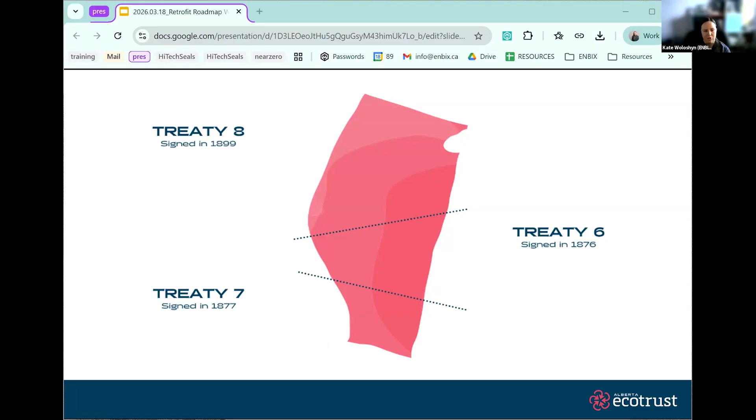These lands have been stewarded by Indigenous people for millennia who have maintained a deep and enduring connection to this land and its resources. We honor their histories, languages, and cultures and recognize the significant contributions they have made and continue to make to this region. As we carry out our work across Alberta, we commit to respecting and upholding the values and traditions of Indigenous communities who have lived and continue to live here.

Alberta EcoTrust is a charitable organization advancing environmental and climate solutions across the province. Since 1991, we partnered with governments, industry, nonprofits, and Indigenous communities to mobilize resources, deliver innovative programs, and support projects that make a real impact. We're also a founding member of the Low Carbon Cities Canada Network, a national initiative that accelerates equitable climate solutions in cities through the Climate Innovation Fund.

Through the Climate Innovation Grant, we fund organizations in Edmonton and Calgary working on low-carbon solutions, including the Retrofit Roadmap. This funding helps turn emission-reducing ideas into real-world projects. Whether it's technology demonstration, collective impact, or policy advancement, we support initiatives that drive innovation and deliver tangible benefits to communities. Ultimately, our goal is to strengthen and support those leading the way on climate solutions.

We have two main programs focused on the built environment: the Emissions Neutral Building Information Exchange, or ENBIX, and the Retrofit Accelerator. ENBIX brings the building industry together to share knowledge, build capacity, and support sustainable building and renovation practices across Alberta. Our goal is to reduce emissions from both new and existing buildings. We do this by hosting events, sharing resources, and strengthening skills and training, peer-to-peer learning, and communities of practice, helping people and organizations turn ideas into real-world impact.

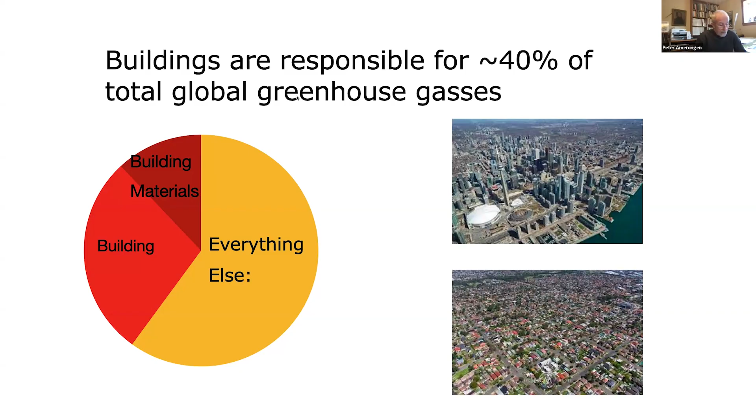I doubt that you folks need to hear this, but deep retrofits are not a choice. We really just can't make our GHG commitments without them because they're such a big chunk of global GHGs and Canadian GHGs as well. So just for housekeeping, when we talk about deep retrofits, we're talking about preparing a building for an emissions neutral future, basically by reducing the energy enough so that it can be powered from emissions neutral sources.

And so why do we need a roadmap? Well, retrofitting is a new undertaking. Basically, we've never tried to save a planet before, and it takes a new way of thinking. And we like to think that we've got as much experience as anyone in this. We've done feasibility studies. We designed and built the Sundance project and a number of other residential projects. We've collaborated on studies in other regions in the country, and we've documented a bunch of them on all kinds of buildings, single family, multifamily, commercial.

And even with all that experience, this is a work in progress. We're still learning from the buildings and figuring out how to do this. So I welcome any observations or comments from any of you about how we can do this better and any mistakes you think we're making. In general, I want to start by listing the problems that need to be addressed, then have a quick look at a few retrofits, and particularly what they've taught us, then look at the recipe that they suggest, and then talk about some shortcuts.

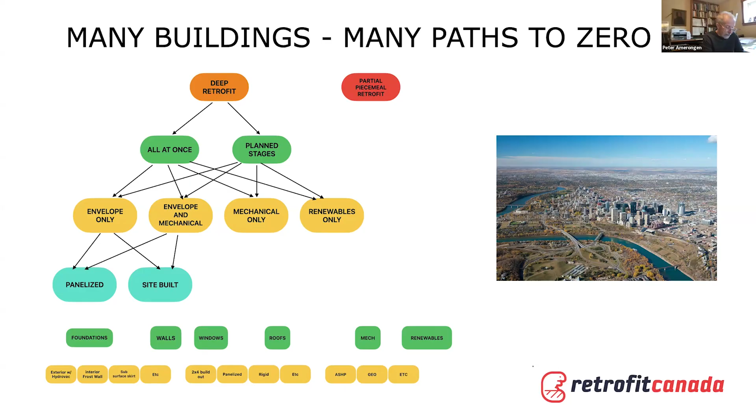And while most of my examples are from residential construction, we've worked on enough non-residential projects to realize that the planning principles that we've learned apply pretty much across the board. Besides cost, the habit that we've got in this country of piecemeal upgrades is another significant barrier that we've got to deal with. And one of my favorite examples is a building that we encountered on the Sundance retrofit. It desperately needed new siding.

They had the sense to know that was an opportunity to add some insulation, but were talked into adding only 3/8 of an inch by the siding contractor, who didn't want to deal with the trim around the windows. So they missed the opportunity to make the building more airtight, to think about how airtightness could tie into other components. When we did the deep retrofit, we covered that up. That money was completely wasted - in fact, it cost us money to deal with over what had been there before.

And we see this - I'll give a couple other examples when I talk about the SSRIA projects. But one of the major problems is that most energy audits and incentives result in only isolated upgrades, rather than a comprehensive plan for zero.

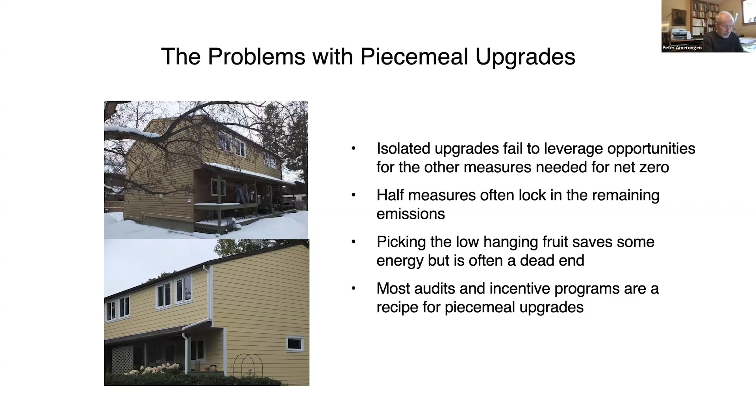And there are other complications in addition to these. There's a serious shortage of trained energy advisors and designers, contractors, and even architects and engineers. They just haven't had the opportunity to gain the experience - and in some cases, the humility to know that they don't know.

And we've somehow got to do this. Basically, to get to emissions neutrality, it almost invariably means we need to electrify, and somehow add this huge load that's now being met by natural gas to the grid without blowing it up.

And there are also risks associated with most upgrades. You change the heat and moisture flow, and you've got to be careful that you're not introducing damaging buildups that can undo your work and put you in a worse place than you started.

So the Sundance project - we didn't realize it at the time. I don't know how many of you know about it. It's an Energiesprong inspired deep retrofit to a 1950s or 1970s townhouse complex in Edmonton, made possible by a research grant from NRCan. The co-op and we didn't know at the time, but the project was the result of a very fluky alignment of the stars - and it's only by looking at other projects that we realized how fluky.

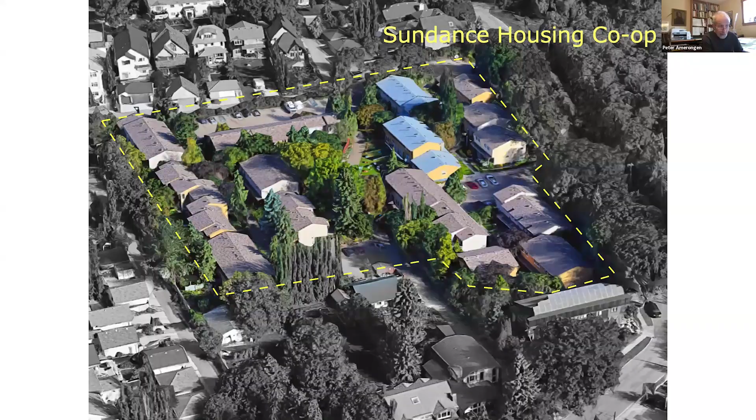Just to give you a sneak peek, we did the full Energiesprong thing, where we learned how to do digital scanning and take the scan to panel drawings. I can't help bragging that every single one of our 350 panels fit.

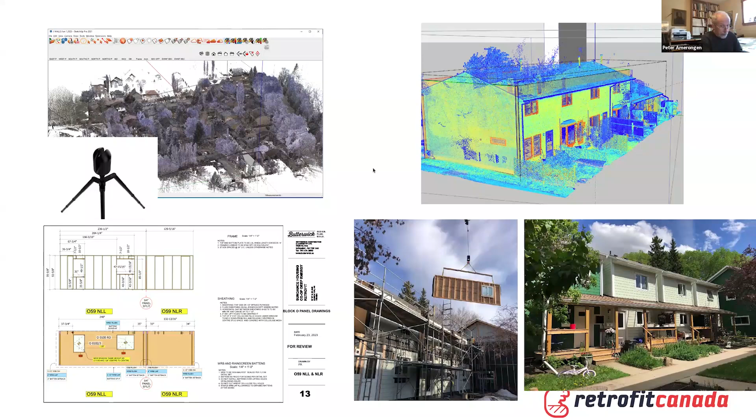It was pretty amazing and really fun. We did the full envelope upgrade, putting a nice warm jacket around the whole house with off-site panels and a scissor truss roof over, and then we were able to get rid of the gas lines and put in air source heat pumps.

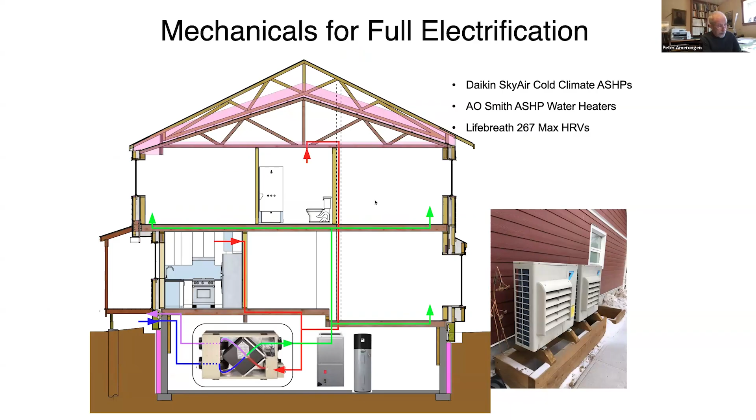We added HRVs and air source heat pump water heaters, getting very close to net zero and making life better for a whole bunch of people.

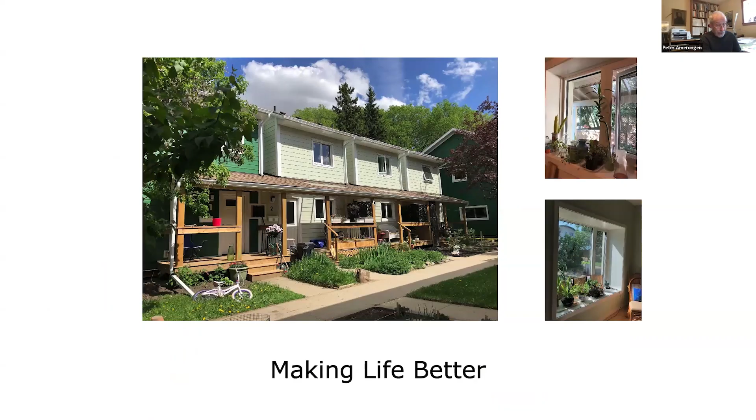So that was the other learning, that people love this stuff. Another project that was very instructive for us, in terms of the variety of solutions that are going to be needed, was this three-house project subsidized by SSRIA.

On every single one of these, people had taken subsidy money and made upgrades that we had to undo.

On the top one, they had put on solar panels, and had the sense to replace the shingles with the solar panels, but that was one that needed the roof to be built up over it.

It had only a 2x4 for insulation space. So we ended up taking those off, throwing away the shingles, and having to put the panels back on.

On the middle one, they had replaced the windows with triple glazed units, but they were very leaky sliders with very low performance specs, and we ended up replacing those as well.

On the bottom one, they had added R50 in the attic insulation without doing anything about the air tightness.

So it just really, over and over, brought home the consequences of half measures.

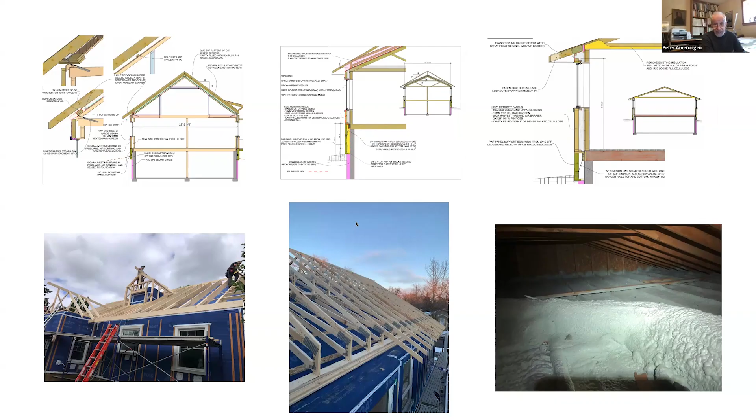From other projects, we learned panelization isn't super practical yet, and we still don't have a panel supply chain that makes it work. Ultimately I think that's where we're going, but...

Because of the work involved in digital capture, transportation, the crane, and all that, it's still kind of a wash. So on a one-off basis, the wall build-up approach, site built, is more practical.

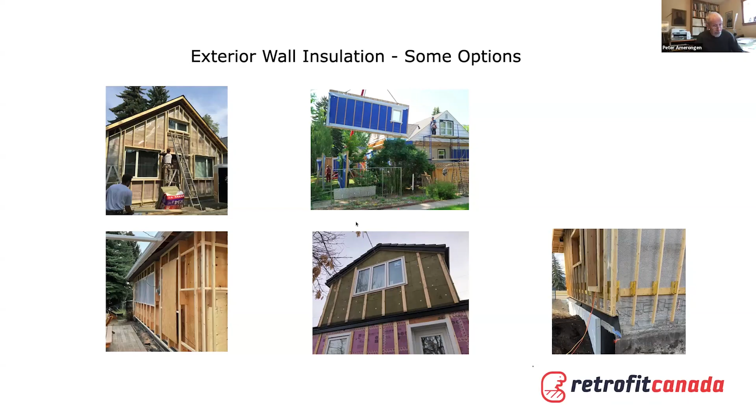It's not as energy efficient as the other projects we've worked on, but because the difference between where we were and where we needed to be was so small, the only thing that made sense was the geothermal system.

And then get the electricity from solar. Many lessons with that too, and we ended up doing this with small equipment on a small site - another thank you to EcoTrust.

They're helping us fund a project where we are experimenting with directional drilling for installing geothermal systems, without turning the site into a World War I battle zone.

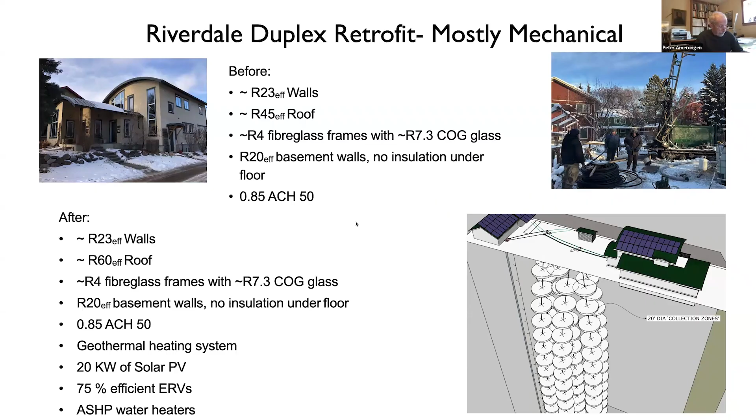And then one project that really brought home how we need to think about these is one in Southern Ontario. It's for a couple that moved back from Edmonton to be closer to their parents in Southern Ontario.

They bought this house with the intention, and with some assistance from us, of finding a house that would be suitable for a net zero retrofit. They couldn't afford to do it all at once, so we had to think about how to do it in stages. The first step, as always, was to do an energy audit to figure out where the energy was going.

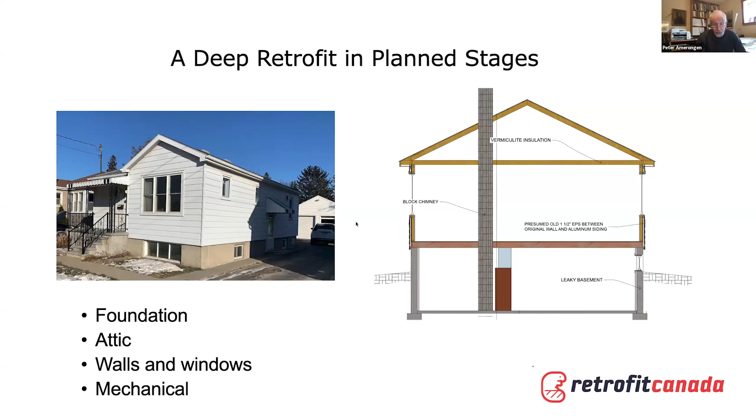Then we had a close look at the house to see what it needed. Unfortunately, they had bought the house during the pandemic and couldn't get an inspection because there were bidding wars going on. They discovered after they moved in that there were some pretty bad leaks and the foundation needed work. That was also one of the biggest heat loss areas in the energy model, so digging it up to put in the weeping tile was an opportunity to insulate the foundation very easily.

But while they were doing that, we realized that if the basement windows were done at the same time, they would never need to touch that again. So the idea was to do the insulation, the weeping tile, the windows, and fixing the grade all in one operation. They put flashing on top of the exterior insulation that was added, and then never touched the basement again.

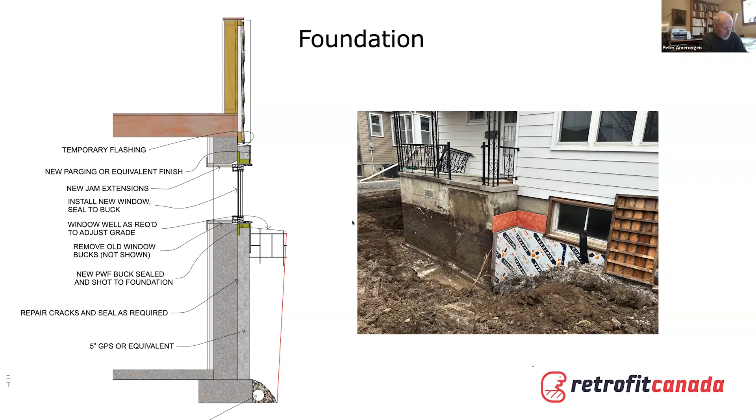The next phase was the attic. It was very poorly insulated, so there was a big energy upside. All it had in it was a bit of vermiculite and some isolated fiberglass bats lying around. They were uncomfortable with the vermiculite because of its asbestos content.

So the plan was to suck that all out of there and add 2.5 inches of spray foam to make it airtight. But before doing that, they took out the existing chimney and used that chase as a pathway to get ducting for a future HRV up into the attic, then run that over to pick up the exhaust from the kitchen and bathroom. All of that was done before the spray foam, so the spray foam could encapsulate it and give them an airtight layer — basically the air barrier and vapor barrier for the house.

Even before that, they also installed a duct for future PV — same idea, never touch it again. When those two phases were being done, attention was paid to the details of how the eventual wall air barrier would tie in.

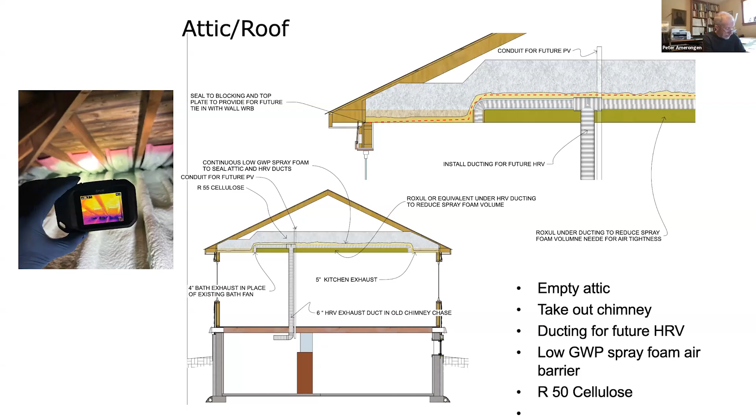But as it turned out, their air conditioner, which is not optional in Southern Ontario, died, so they needed to do something about the mechanical system. At that time they yanked out the furnace and put in a cold climate heat pump sized correctly for after the walls and windows were done, and did the HRV and hot water tank at the same time. That was supposed to have been the last phase, but it got moved up. Because the heat pump was a little undersized, they supplemented on a couple of cold days that first winter with baseboard heaters.

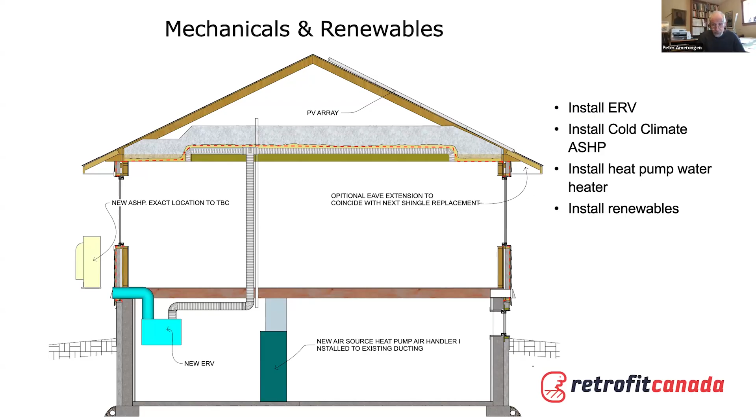Then the last phase was the walls and windows, which were easy to tie in because we had thought about it. I think you can see this last phase was done this spring — I need to get some pictures of it.

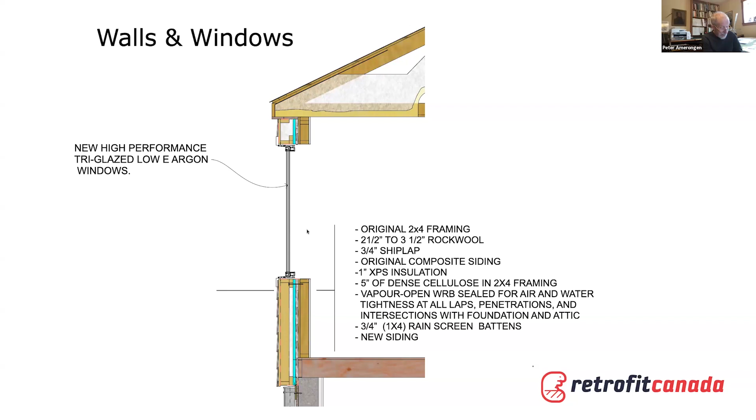So from this, we've derived what we're calling Deep Retrofits 101, which is the foundation for the roadmap. You start by dialing in the best 2040 version of the building, considering where the energy is going now and what the building needs or is likely to need in the way of improvement and maintenance. Then you develop a plan to do that as efficiently as possible, geared to the conditions and constraints associated with that building. For example, if it's a historic building, you might just say we're never going to get all the way.

We're going to have to get, just count on buying emissions neutral energy. But whatever the best 2040 version is, if you can't do it all at once, make sure everything you do is to the 2040 plan, and do it in a way that anticipates the remaining steps.

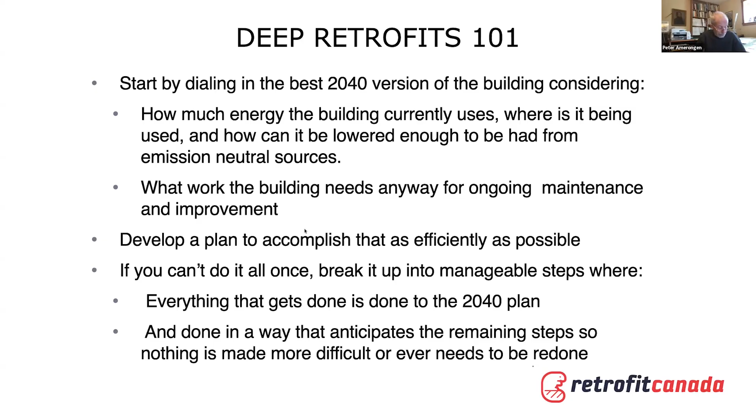So the general recipe that comes out of that: the first step is to establish some kind of ballpark feasibility to make sure that it's a real project.

This can be a challenge while we're still in these early days. Finding an experienced contractor, designer, or energy advisor can help a lot, and that can be difficult depending on where you are. If you're in Edmonton, Calgary, Ottawa, or a couple of other places in the country, there are getting to be some fairly well-established retrofitters that should be able to help you.

It also depends a bit on the project type. On the bigger, more complicated projects, it's going to be hard to find these numbers. We're hoping our case study library will be able to help with that as we go on.

But once you've decided you're going to go ahead, basically assemble a team—it's got to be some kind of integrated project delivery, where all of the major players come together, learn from each other and each other's problems and challenges, and work out together that optimal solution.

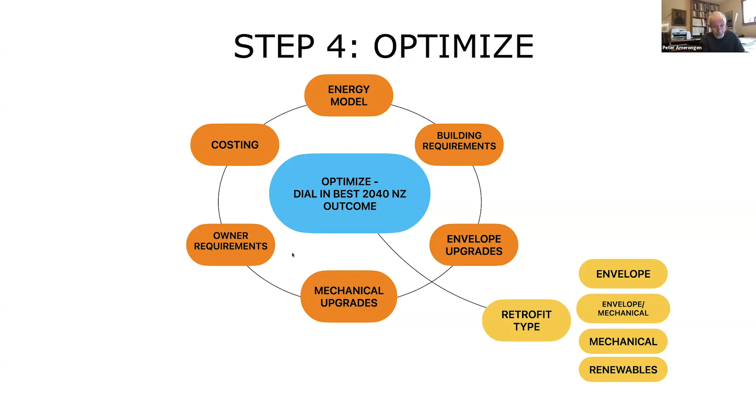But SAIT has also developed a roadmap with us which would help—it looks something like this—that breaks down some of the steps a little bit more. They also have a terrific course that we helped them develop to teach the basics of deep energy retrofits, as sort of ongoing learning.

Another work on this is being done in conjunction with the GNPP program that our library is being funded by, which has basically the same steps but broken down into a lot more detail, and will be available soon. But it's fundamentally the same, a very similar process.

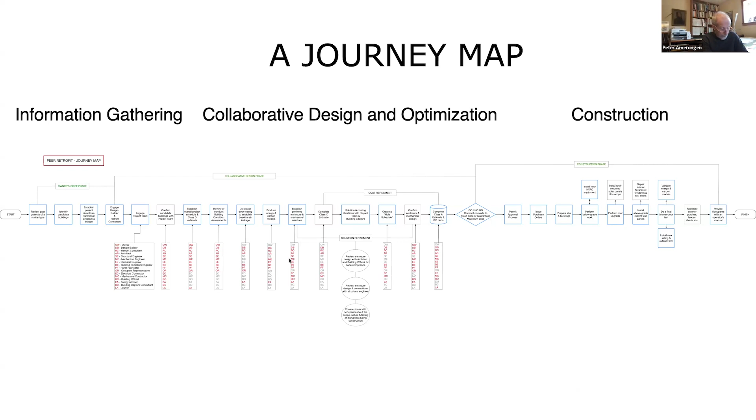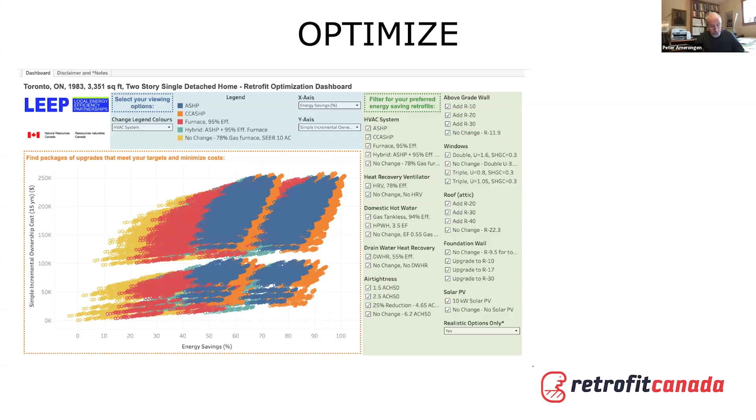So this is all fairly daunting and a lot of work, but we see hope on the horizon for making it a lot simpler. Some of the shortcuts that have come up, or that we've become aware of, right off the bat is...

There's a study done by NAIMA Canada, the North American Insulation Manufacturers Association. They put out a guide, and it was done by RDH, one of my favorite energy efficiency consulting engineers in the country, next to Renew Engineering.

They ran optimizations for every climate zone in the country. So basically, if you have the opportunity to do a major upgrade in the building, roof, walls, you don't need to do that optimization. Just go to the NAIMA recommended level and you're done. The big cost is replacing the siding, and the incremental cost in going to the highest level is relatively small.

And the same goes for windows. If you're replacing the windows, the cost is in the labor and the frame. The incremental cost for high performance windows is relatively small.

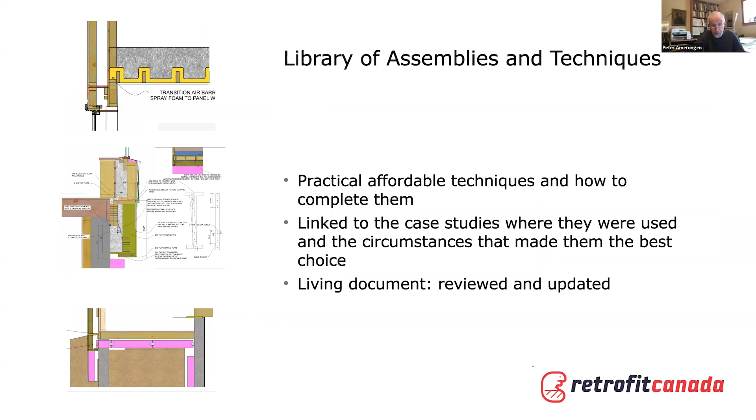This is just a little illustration of what we imagine it'll look like. I want to thank you all for being with me here, and apologize for the fact that this is still a work in progress. There's a lot more detail on our Retrofit Canada Learn page.